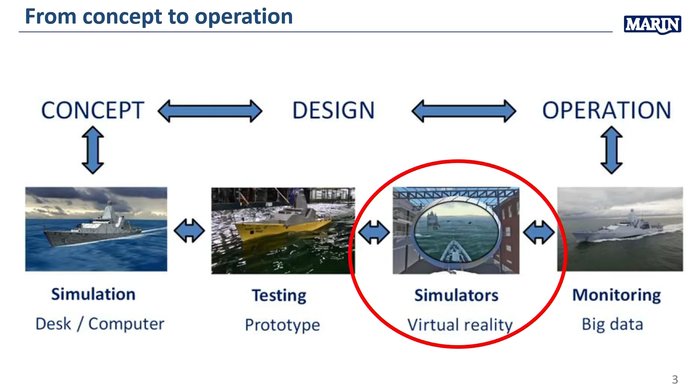So how can we help as MARIN, as a research institute, how can we help our clients to make shipping smarter, cleaner and safer? We at MARIN have great facilities and we are really well known for model testing. Since 1932 we have very large basins, or call it swimming pools, where we can simulate wave, wind and current. And on model scale we can test all kind of ship models and we can optimize hull forms. For example, the E-Tug from Keynote is also tested in our basins. I just heard during the coffee break.

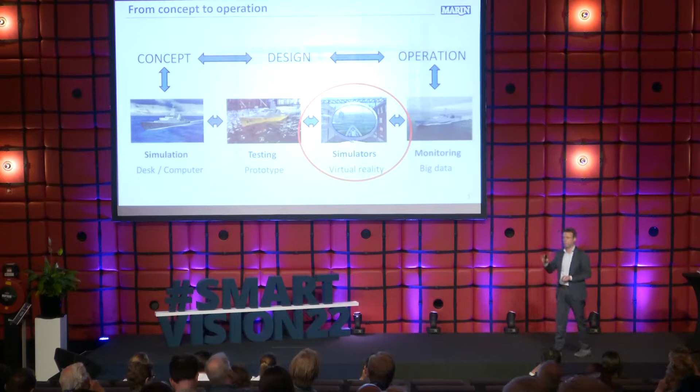That's model testing. That's typically what we do during the design phase of a vessel. In the concept phase, we have also our own in-house built software, like computational fluid dynamics software, CFD. And the good thing is that our software is continuously validated with the model testing. But we do more. We have also monitoring. We have a department who is looking at the real vessels and looking to the data of the real vessels and checking if what we have predicted in the concept and design phase is correctly done.

And then the simulators. When the man or woman is also in the loop, operating the vessels, then we are talking about simulators. And again, the simulation software is developed in-house. It's the same software as we're using for desktop studies. So the good thing is that our ship models in the simulator are also validated by model testing and by numerical calculations. And that is very important because we think the ship models must be right for research studies.

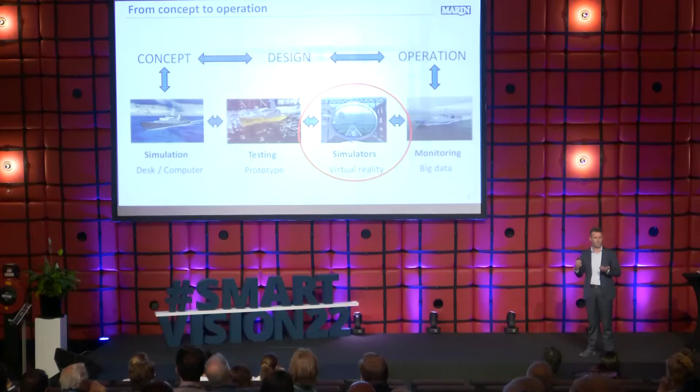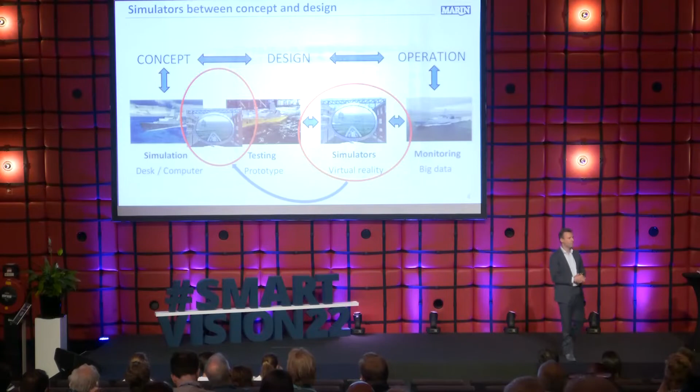Traditionally, the simulators are used between the design and operation phase. The design is already there, and then you can teach people how to operate these vessels. Or you can train or research very complex maritime and offshore operations. But what we are doing already right now, and we are going to do it more and more, is bringing the simulators also to the concept phase.

So you have your first innovative ideas, and you can test them already on the simulator. For example, if you have a new yacht design and you have several options, why not bring in the future owner on the simulator and let them feel on a motion-based platform which of the concepts is the most comfortable yacht for him in future? Another idea is advisory systems. You can test advisory systems already on the bridge of the simulator, and then you can further optimize this tool.

This is what we're going to do more and more, also in the concept phase. But we have already had simulators for a long time. In 1972, we had the black and white. I said we, but I was not there yet. But the life was black and white, and we had our old simulators. And in 1992, it was upgraded to the simulators we have right now.

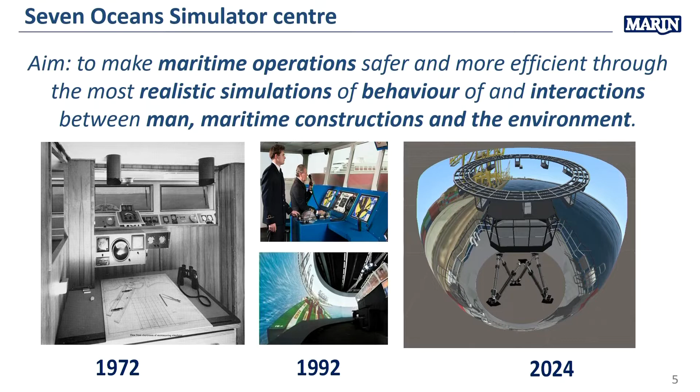And to be honest, the hardware is a little bit outdated, but the software is continuously developing, improving by the model testing and the numerical calculations we do. So the hardware is outdated, and that is the reason why we go to the new simulator center in 2024.

We will bring full mission bridge simulators like STC already have, and MARIN also. But we also bring new technologies like VR, AR, and I just learned also assisted reality. I think that's very interesting to bring in our simulator center as well. We will experiment with all these kinds of new technologies, and let's see if this can help our clients to make the shipping smarter, safer, and cleaner.

What will be really new and unique in the world is this large bridge simulator on a hexapod. So it can move in 6 degrees of freedom within a globe with a diameter of 60 meters with 30 projectors on top of it. So bringing the motion also in the simulation is really cool and new, and I think it's even an improvement of what we already can do.

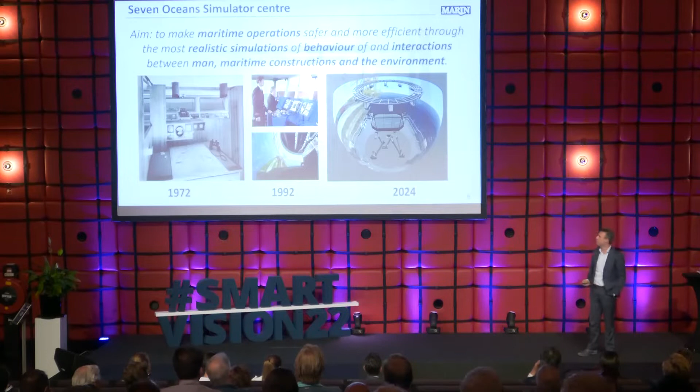Looking to the simulators, I just show 3 of them, what we already have. It's very important to know that we can connect these simulators also. So you can bring in several ships within the same scenario. The lower left is, for example, a smaller vessel that can be a tug, which is connected to the full mission bridge on the upper left.

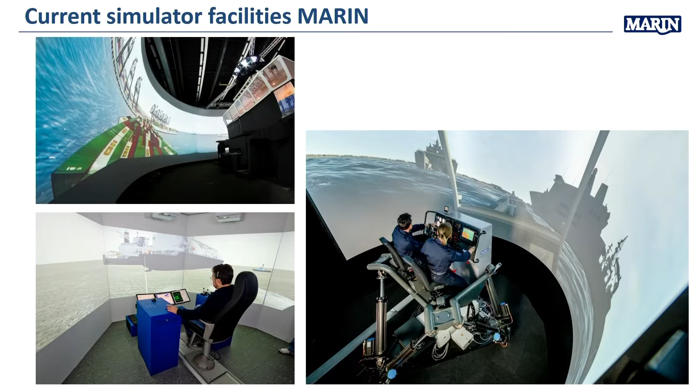The lower right, we have already built a moving simulator, which is only for a 2-seat vessel. This is for the fast, small ships for the Navy. It was designed for the Royal Dutch Navy because all the instructors had problems with their knees and the backbone because they were really bouncing. So that's why we've developed this. And technically, this is quite a challenge.

Why is it a challenge? For example, if you want to accelerate your vessel, you want to have the feeling of acceleration, but you cannot accelerate through the whole building. So what will happen is the motion base will be tilted a little bit, you feel pressure in the back, and you have the feeling of accelerating through the building. And that's nice, but when I'm tilted, also my horizon has to be corrected because I'm looking upstairs. So that has to be corrected by the software as well. So it looks nice, but it's still a big challenge to get this motion cueing right.

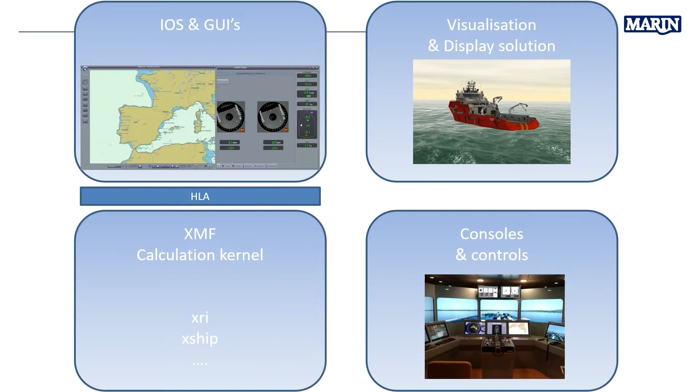And I'm talking a lot about the great facilities we have, and during the day we have seen all kinds of fancy techniques, but Hans Huisman is also here, and he's the human factor specialist. So I have to say this, the human is also very important. But I think he's right. We are also analyzing the people operating the vessel.

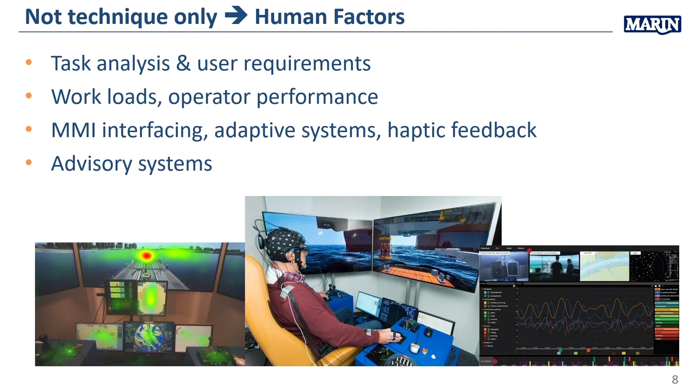And how you can do that, for example, with eye tracking, you can see where he's really looking. For example, if you have designed a new advisory system, is he really looking at that system? Is he overloaded with too much information? That you can test already on the simulator. You can also measure the brain activity or the lack of brain activity. Is he overloaded, yes or no?

What type of studies can you do with the simulators of MARIN? If you look here at STC, you have also great simulators, and they are to train people or students how to operate the vessel correctly.

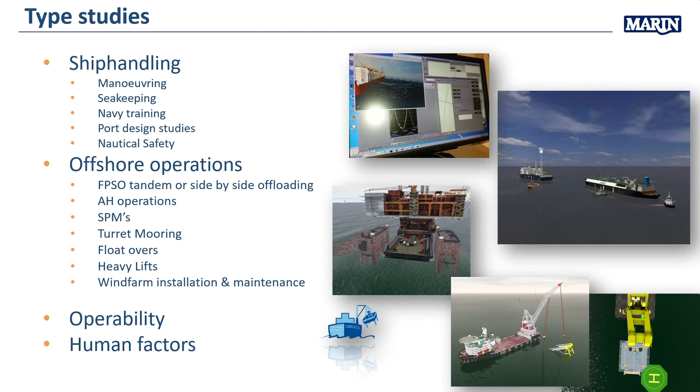That can also be done without simulators, but it's more important when you have very complex operations, like the installation of a topside offshore construction, and you have to place it on that floating barge. Then it becomes more complex, and the behavior of the waves and the ships and the multi-body, that is more interesting. And then you need to do more research, and then the behavior of the vessels must be right, but also the behavior of the waves has to be calculated correctly.

We also use the simulators for port design. For example, we are in Rotterdam; the Maasvlakte 2 was also tested during the design on the simulator. Then you can test if even the biggest container vessels guided by tugboats can enter safely into Maasvlakte 2, and you can still change the design of Maasvlakte.

I will give you 2 movies. It's always exciting if they will work.

The first one I will show you is the installation of the offshore construction. You will see 2 large vessels carrying a large topside, sailing over the barge, which is also floating and has to be lowered down by ballasting. And you will see that a lot of experts and hardware are in the loop. It's a short movie. So you see the 2 large vessels, the topside on it, you see the operators, and this is very important. They already train this very complex multi-body operation.

There is the DP, dynamic positioning operator, in the loop. There's the ballast operator in the loop, ballasting those vessels. There's the superintendent, and there is also, of course, the captain of the ships. And you see more than 1 tug connected to this operation, and the configuration of tugs is changed during this training on the simulator. And you can see what the operational limits are for these kinds of operations.

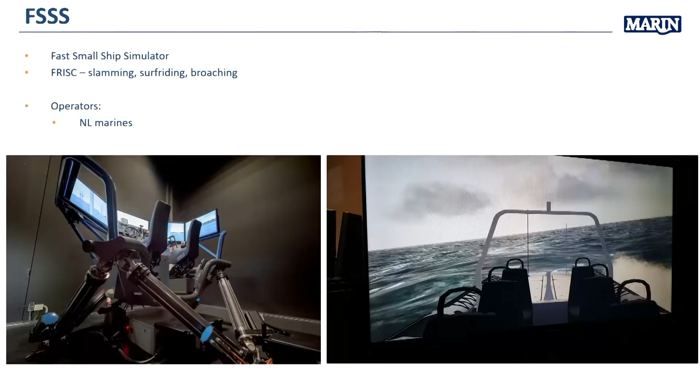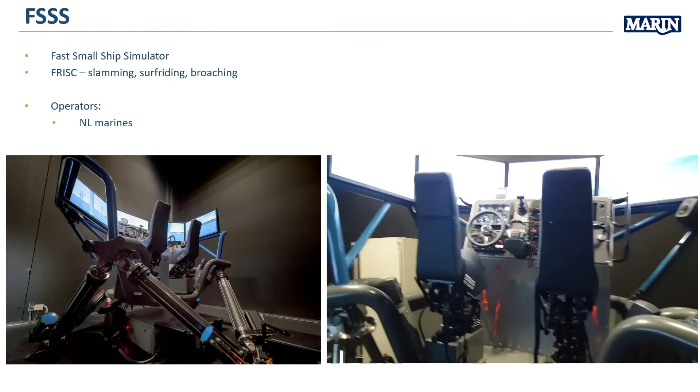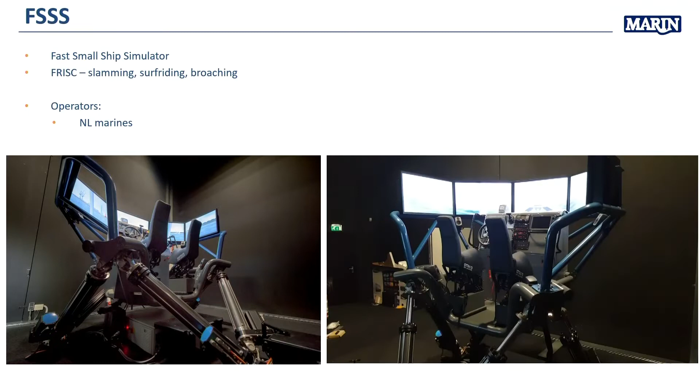This one is just nice to see. When you visit MARIN, I will put you on the hexapod. This is the fast small ship simulator. It can accelerate to 1.5 G. Above that it will be cut off, otherwise you get problems with your back. But for training purposes, this is very interesting. And in the new simulator center, you will have the bridge of 4 by 5 meters in the globe also moving. And that is really new for us.

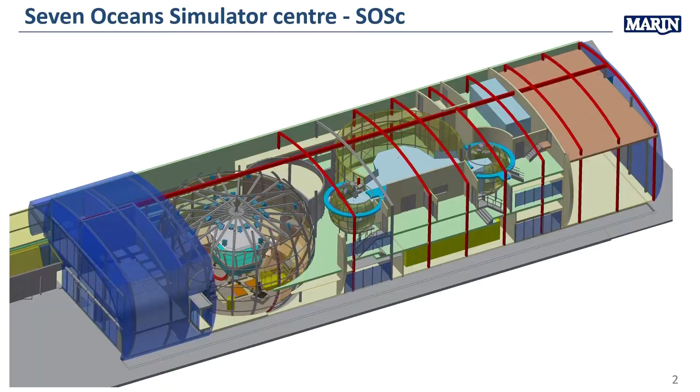The empty space on the right, that's interesting for you. There we will bring in all kinds of VR, AR technologies. We will experiment, and some of them will be really successful and some not. And when it's successful and when there is a business case, we bring it to the market and we start researching new stuff.

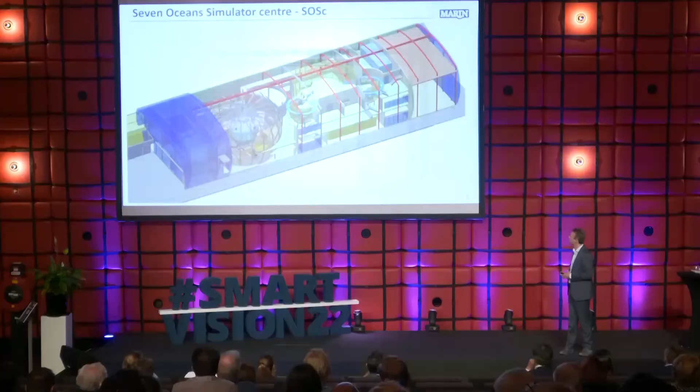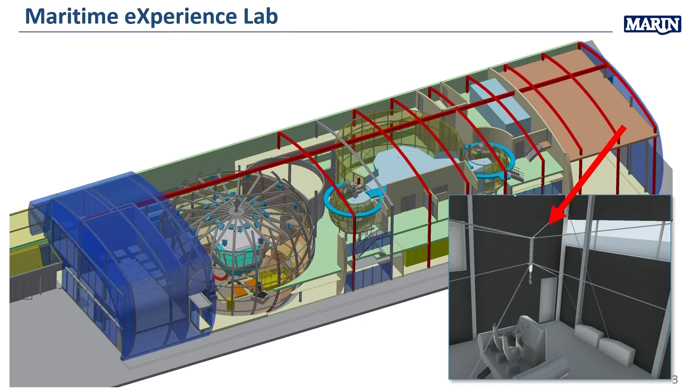We will also have there a cable robot. Sounds cool. A cable robot is a lot of cables and you can move an object through the building. The same cable robot is also used, for example, I don't know if I can say it here, in the Amsterdam Arena. There you have the camera moving through the stadium, and it can follow the players.

We can move objects, and why it's interesting, Hans will explain it, but for example, when you're sailing next to a large vessel with a crane and the hook is coming and you want to grab that hook, you can test this. You stay on the motion base, and it's a very dangerous operation. Why not test it in a simulator facility?

This is my last slide, and I want to welcome Hans. The floor is yours. Thank you. I'll take over.

Arno explained our new simulation center, and I will dive into a little bit more detail on what we can achieve with this center. A multiplayer crisis situation, as an example. It's a building with a lot of simulators, and it's not just a bunch of individual simulators. What we foresee is to create a situation in line with what Berend explained this morning. If you have a vessel with a crew of 60 people, the journey starts. We want to create a situation in which we don't have only one crew from one organization, but multiple players from multiple organizations, different cultures, and how do you cooperate, especially in a crisis situation.

Why? It's not for a day-to-day training situation. That would be too expensive, but to have a mission rehearsal and to discover the weak spots in cooperation between organizations and the weak spots within your organization, and improve that. How to improve? That's the next step, of course. You can think about more training, new procedures, but also definitely improve and introduce new technology.

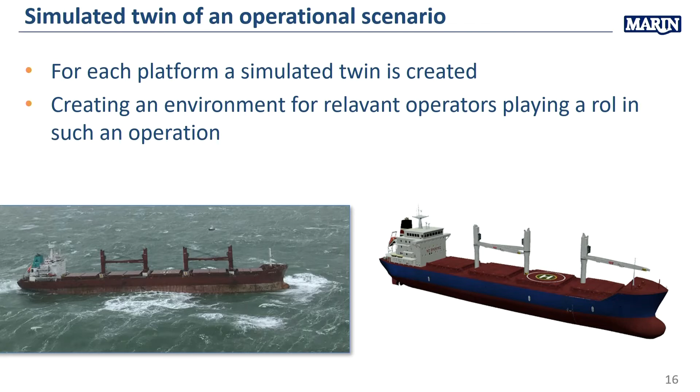I'll zoom into the drifting of the Julietta D. Especially Dutch people will remember that. And I'll zoom into a situation which we can recreate. On the left side, the real vessels. On the right side, the simulated version. And the idea is to create an environment where each operator of each organization will have a realistic environment, being able to perform a job as in real life, as close to reality as possible.

So, who was involved? Of course, the crew of the Julietta D. There was an emergency towing vessel from the Coast Guard. We had two tugs bringing it into the port of Rotterdam. The lifeguards were active. The Coast Guard Communication and Control Center in Den Helder. And the helicopter from the Coast Guard. So, number of organizations, a lot of platforms, a lot of players. How can we replicate that in a simulated environment?

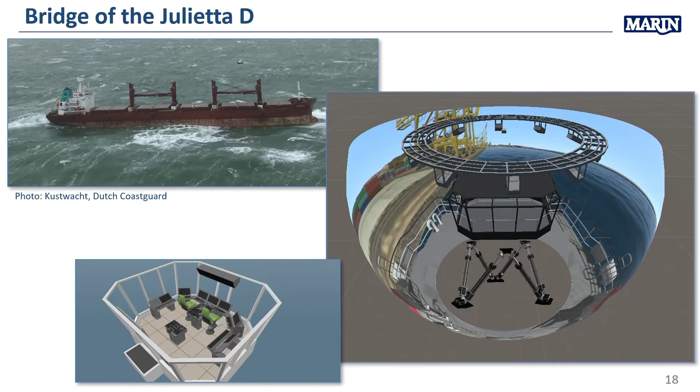First of all, the Julietta D. We've got on the right side our new moving base simulator. And as Arno explained human factors, I will explain some technical details on the simulator. It has a bridge area of 4 by 5 meters. A sphere-formed projection screen with 30 projectors creating a high-resolution imagery of the surrounding all around the crew. So everywhere you look from the bridge, you'll see an outside world, and you'll be moving around. And if you recall the videos from the incident, the vessel rolled quite a lot, so there was a lot of movement at that moment.

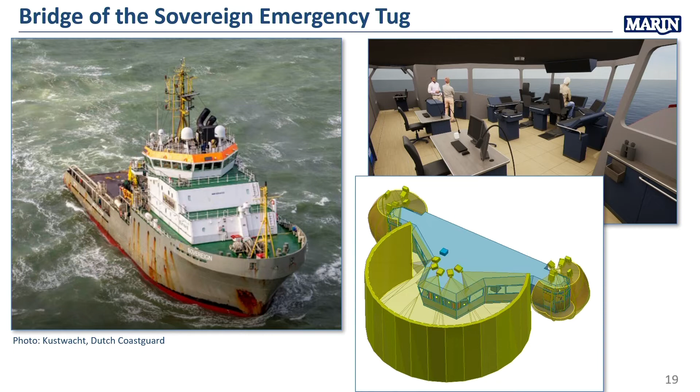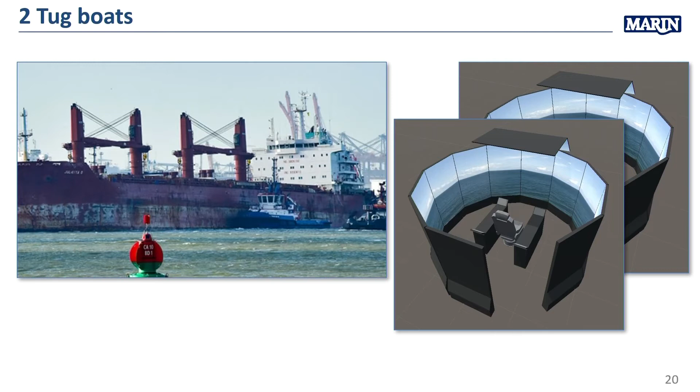The next one, the emergency towing vessel. We have the secondary bridge, the second bridge, as Arno called it, the Mickey Mouse. It's a large bridge from left to right. It's about 20 meters, a large projection screen, and on both sides you have the bridge wings with a separate projection screen. So you have a good situation awareness all around. So that's the second vessel. Then the two tugboats. We've got smaller simulators, 4 of them. In this case, you'll need only 2 of them.

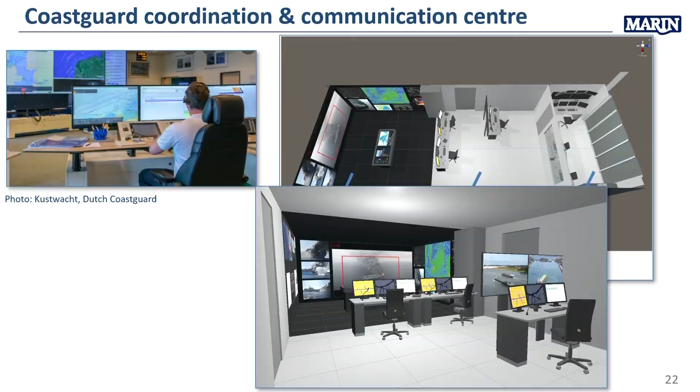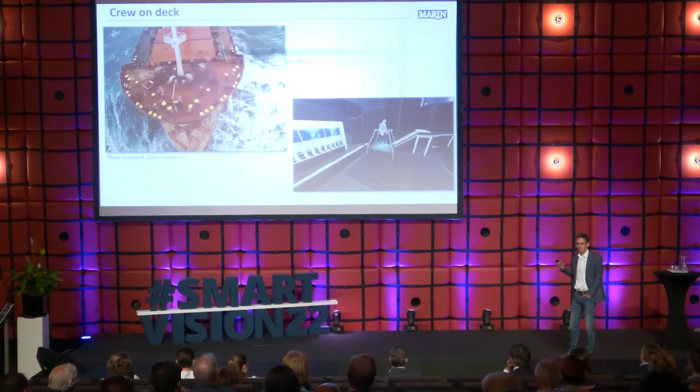Then going to the next step, having the crew on deck. It's a bit difficult to see. On the left you can see a picture of the bow, and the crew is wearing red suits on the red deck. Difficult to see, but people are walking on deck of the vessel in problems. On the right side, you see something we imagined to create. It's not existing yet. Having people in a mixed reality situation, wearing virtual reality glasses, in combination with reality. So for example, on a treadmill, you can walk around. On a small moving base hexapod to simulate the movement of the vessel and to create an immersive environment for someone standing on the deck. So basically this area of the simulation center is intended to create all kinds of replica situations on a vessel other than the bridge.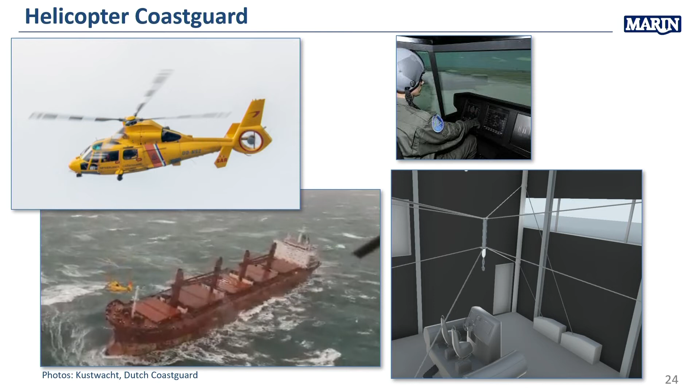The cable robot was already mentioned by Arno. Cable robot, nice development from the colleagues from Fraunhofer. Google it, it's really cool. The crew was picked up by a helicopter from the Coast Guard. A hook is lowered down, you have to grab it, and we can simulate that with our cable robot. Standing on a moving base platform, grabbing a hook, and be picked up from the vessel. We don't have a helicopter simulator, of course. We're a Maritime Institute, but we have very close connections to our aerospace colleagues in Amsterdam from the National Aerospace Laboratory. They do have a helicopter simulator, so we are investigating how we can connect their helicopter simulator to our simulators.

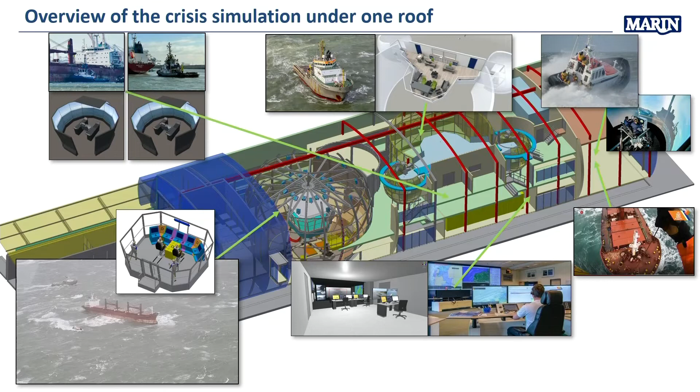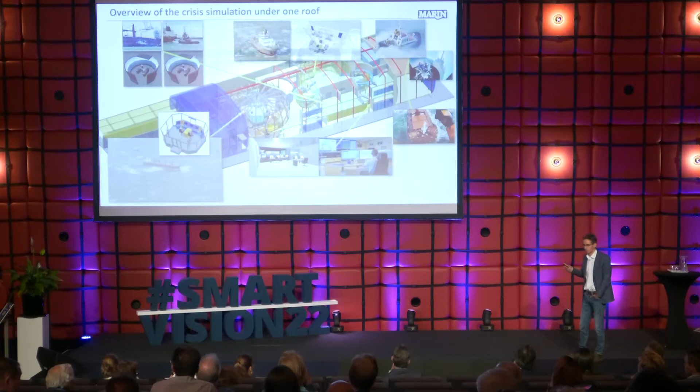So, to summarize, we got one building with a lot of simulators, and all players from different organizations, we can connect, we can create a realistic environment for each of them and replicate a crisis situation. This crisis situation is an example for improving for future situations, but you can imagine that we can also simulate non-existing future operations and see whether new technology can improve the cooperation between the players within an organization or across organizations.

And that's how we hope that our new simulator center can, well, further shape our vision of safer, smarter, and cleaner shipping. Thank you.

Wow. That really looks like a really cool playground. It will be. Yes, absolutely. Some questions, some interactions, maybe some vulnerabilities from your side to try to open up to the connection. Maybe ask the questions to the crew, who you want to interact with? What's still keeping you busy at night?

Now I can remember one of the questions, it was a student from University of Rotterdam. He was thinking, why not independent research? We are a knowledge institute, non-profit organization, so we are independent. And what we do, not sometimes, a lot, is joint industry projects. You can imagine, for example, the wind farms. All the ships will struggle with the wind farms. It's a danger. Maybe you can do research together in the simulator center at MARIN, but also the basins.

So working together, looking for solutions, testing innovative ideas, come to MARIN, do it together, bring money together, and we have a nice playground to test. So I can ask you, what kind of challenges maybe we can research, or should we research as MARIN? I can think of ideas, but maybe you have better ideas.